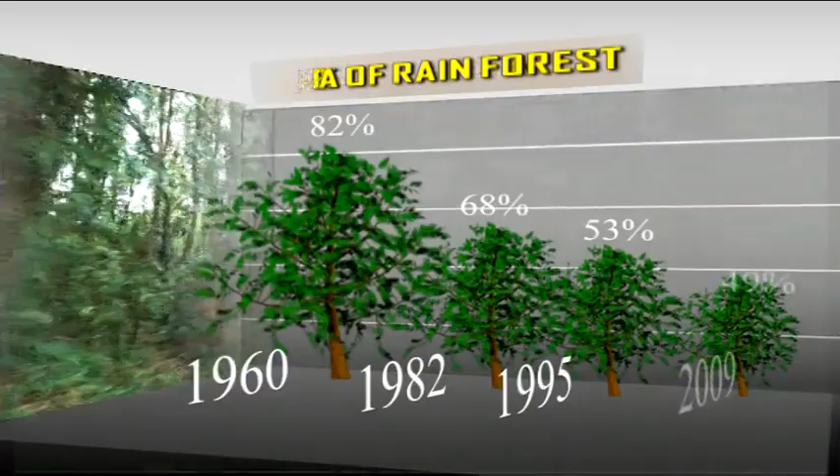On the other hand, bamboo has many advantages to serve as a substitute for wood construction. Bamboo is one of the fastest growing plants on earth. Unlike trees, all bamboo has the potential to grow to full height and girth in 3 to 5 years, whereas teak, the usual building material, is ready to be used after 40 to 50 years. Bamboo grows easily and can live and adapt in all places.

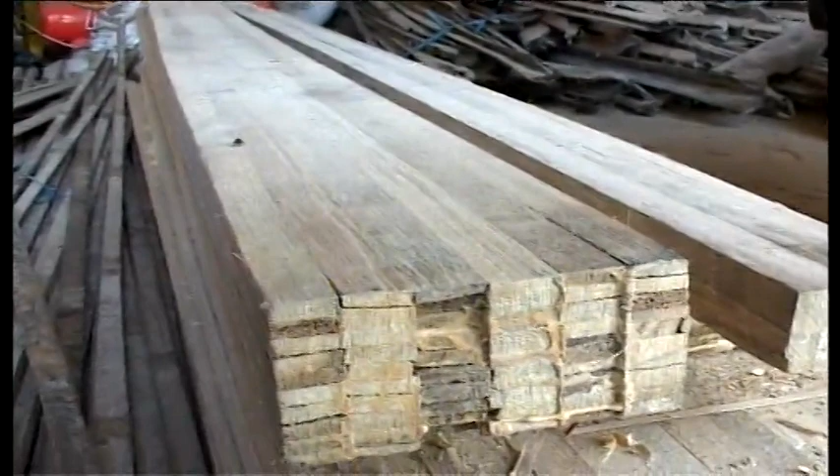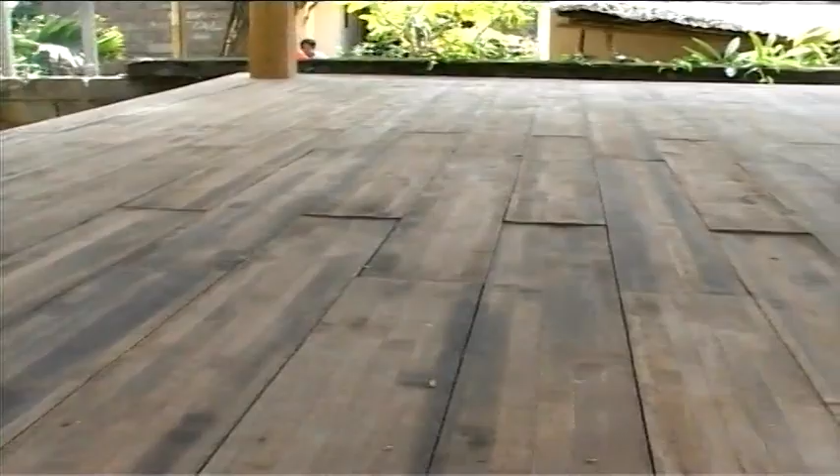The bamboo is then sliced into ribbons, cured to the proper moisture content, and then engineered back together with adhesives using gluing techniques and pressed together to produce a rectangular shape, becoming one entity. Through the stage of cutting bamboo, an adhesive is added so it becomes a board, plywood or beams. Laminated bamboo does not retain the characteristic shapes of the bamboo raw material from which it is produced.

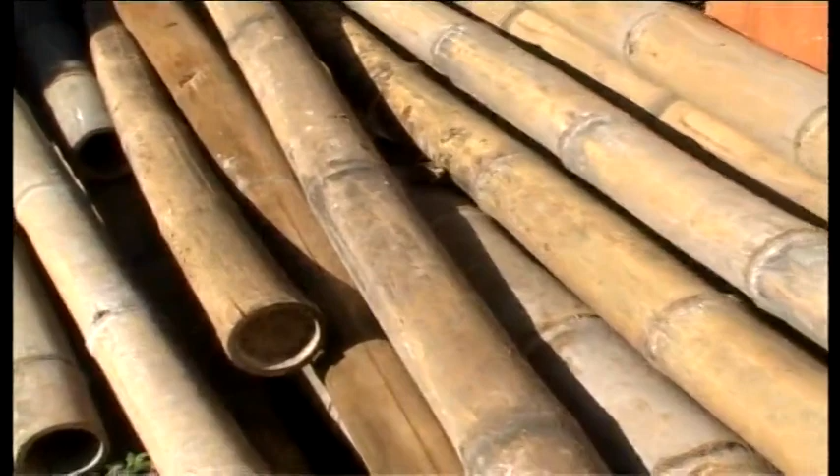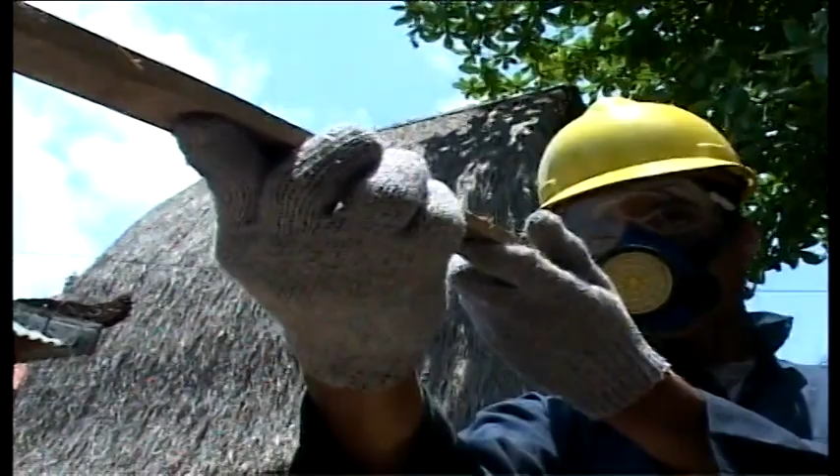Petung bamboo, bulung bamboo, and lyre bamboo can be used as raw materials. Among the three, petung bamboo has a fairly thick stem wall, between 10 mm and 30 mm. Its thickness will determine the use of an adhesive in laminating bamboo components. The bamboo is harvested between 3 to 5 years of age for optimal hardness and strength and is free from pests.

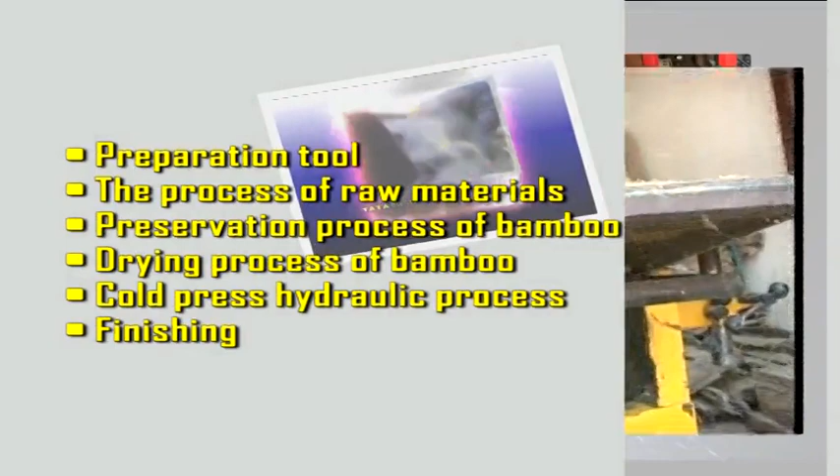The process of laminated bamboo production requires several steps: preparation of tools, processing of raw materials, bamboo preservation, drying bamboo, cold pressing, and finishing. Machetes and axes are used to skin the bamboo. A handsaw is used to cut the bamboo according to the desired size.

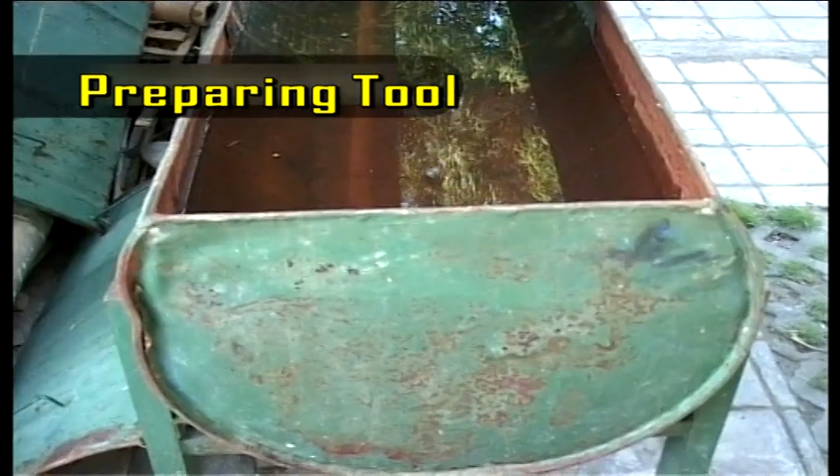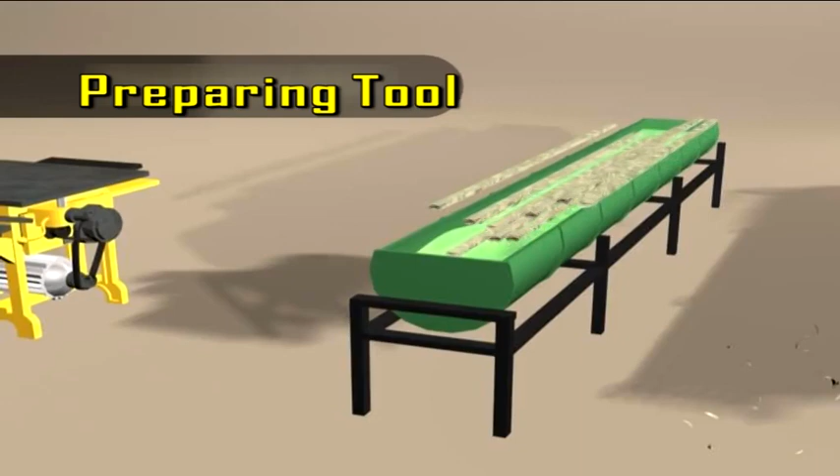Another tool used to process the bamboo as raw material is a vessel with a width of 39.5 centimeters, height of 45 centimeters, and 450 centimeters in length, which is used for soaking the bamboo in the preservation process. A planer is used to smooth and shape the strips of bamboo for the lamination process. Other tools needed are a brush, digital scales, measuring cups, an adhesive, and a cross-linker.

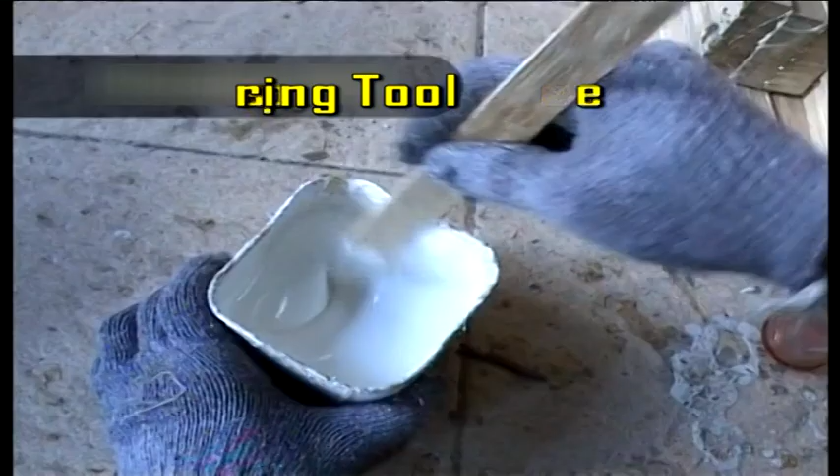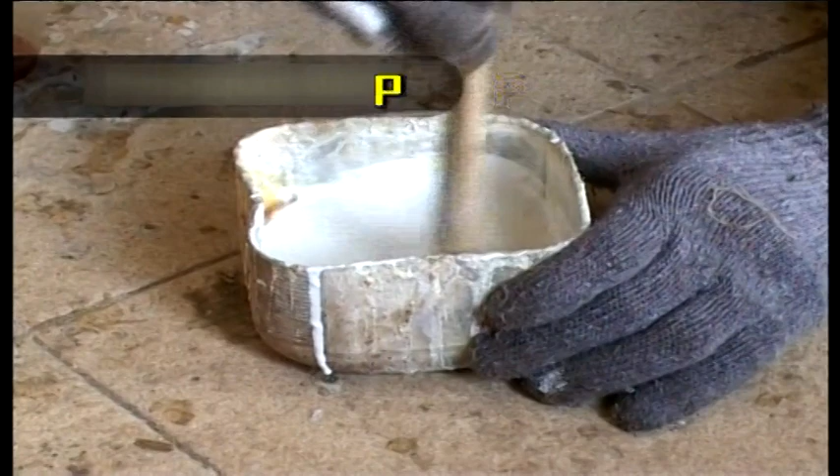The adhesive we use is a polymer. A polymer is a thick white liquid, with the same thickness as wall paint. Polymer is easy to harden at wide temperature variations, more environmentally friendly because it does not contain formaldehyde, economical, and has a strong adhesion.

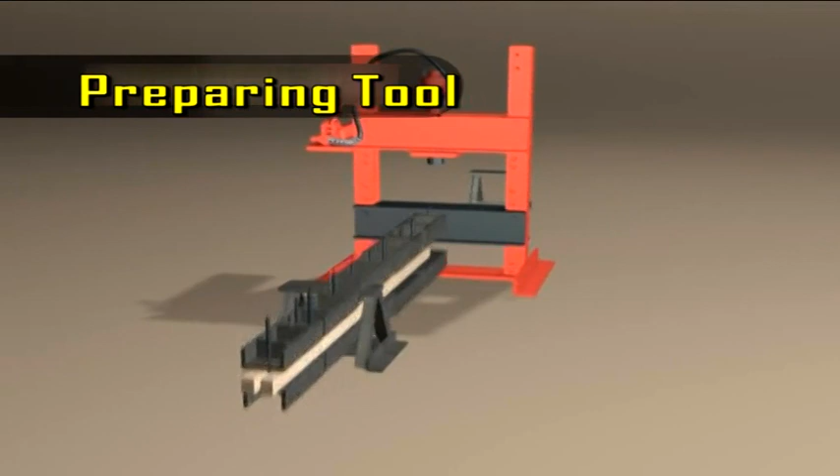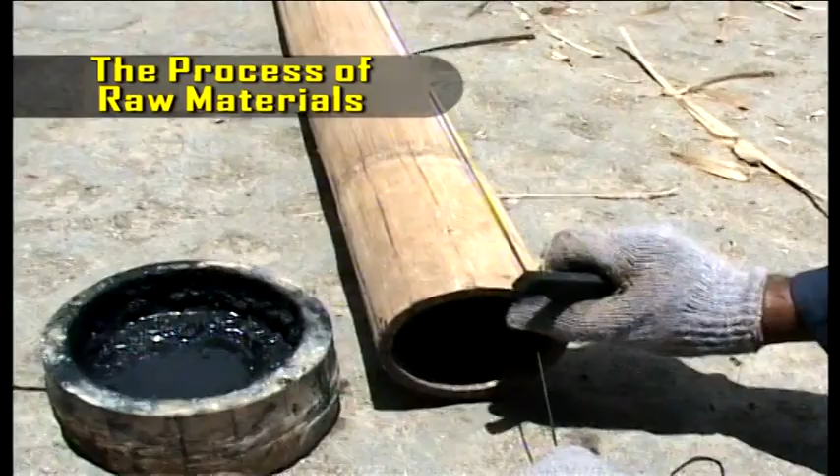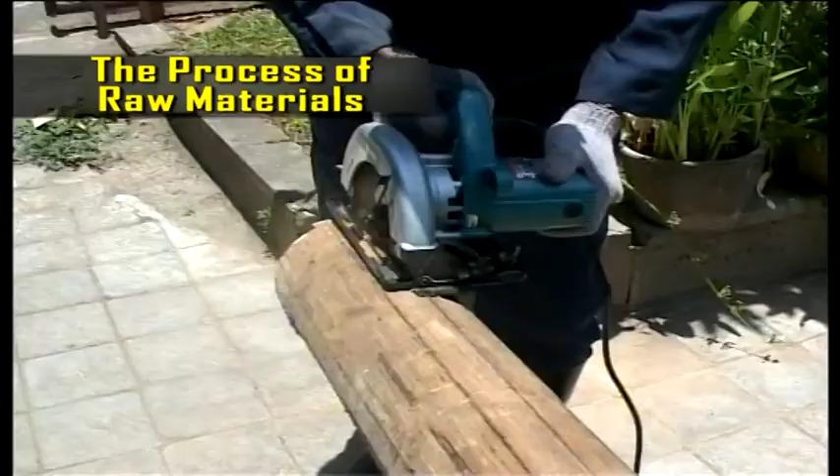Isocyanate is used as the cross-linker, with a proportion of 10% cross-linker and adhesive of 225 grams per square meter. Hydraulic compression complete with its clamps is required for the lamination process. Dried bamboo skins are removed and then ripped lengthways into slats of 25 mm to 35 mm wide. This technique is done by using a cutting machine or a hand saw.

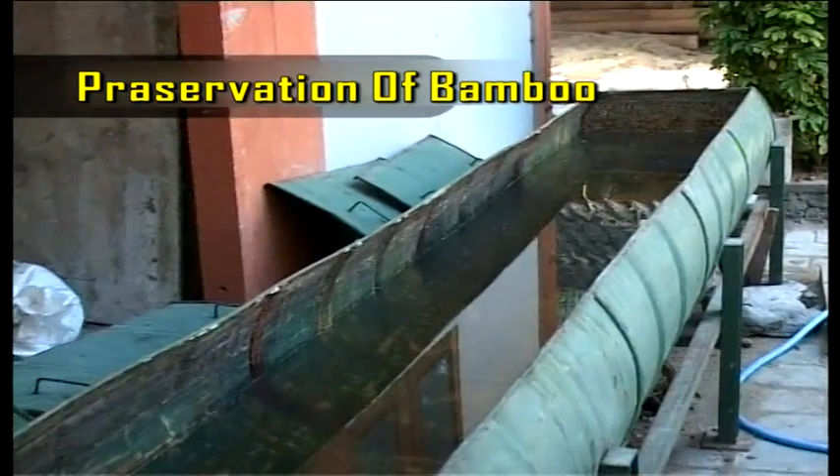The types of chemicals allowed by the Commission of Pesticides, Department of Agriculture, among others, are copper sulfate, potassium dichromate boric acid, sodium dichromate boric acid, silicate copper, fluoride ammonium dichromate acid, sodium tetraborate boric acid, and polyborate boric acid. A 16 SP impralit or boron is used to protect the bamboo against pests using cold immersion preservation techniques. This technique is performed as follows.

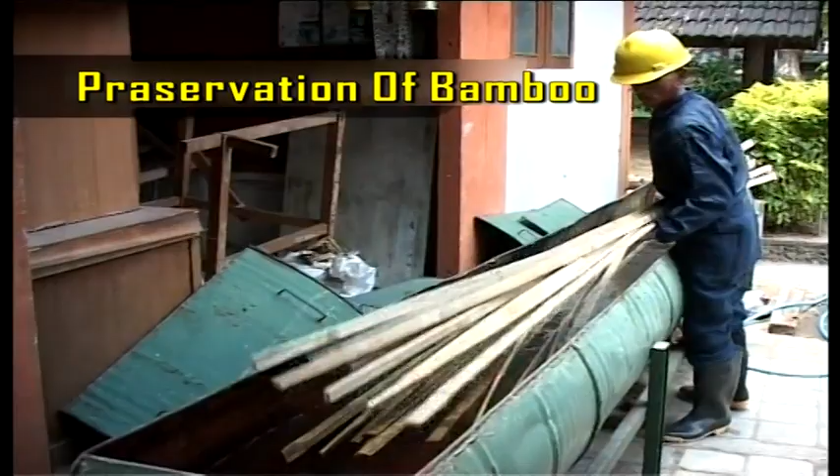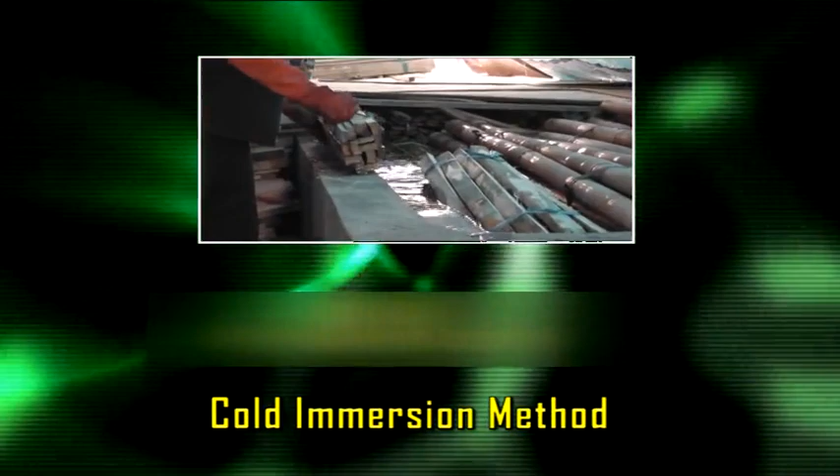Bamboo is inserted into a long vessel with a diameter of 55 cm and 450 cm length. The bamboo is soaked in a mixture of boron and water with a ratio of 5% of the volume of water. The soaking process is performed for at least 5 days. Bamboo that has been preserved for 5 days can continue to the drying process to reduce the water content in the bamboo. Bamboo is ready to be processed when the water content has reached 15%. Bamboo strips are planed to remove the nodes with a machine planer to obtain a precise size.

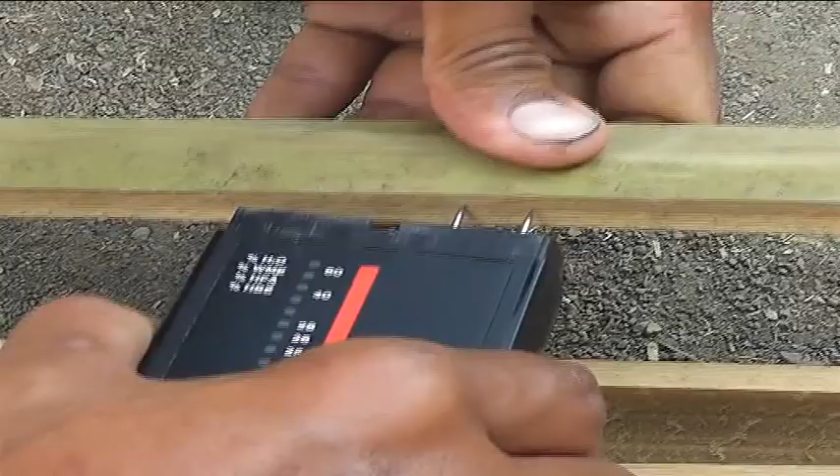The lamination process is staged as follows. Prepare raw materials, which are bamboo strips that have been smoothed and preserved. Smooth bamboo strips are glued by arranging them vertically, parallel to the fiber arrangement, in order to obtain a set of bamboo strips. Bamboo strips must be completely dry and clean so that the glue and the material stick perfectly.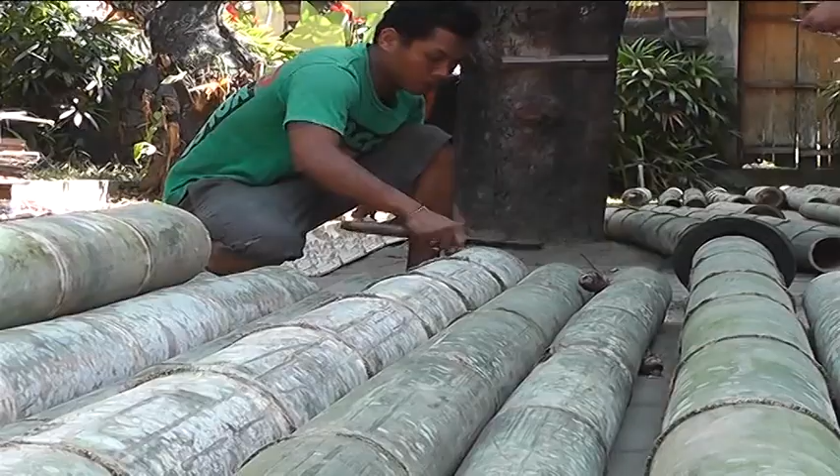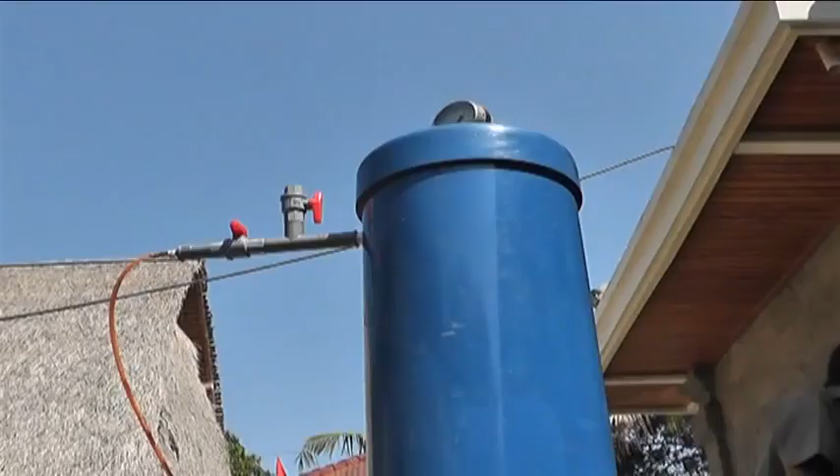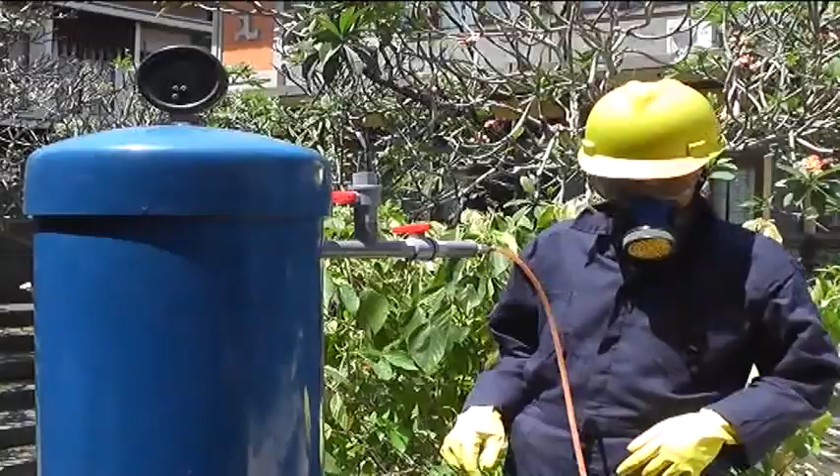Necessary equipment includes measurements, a measuring cup, bucket, stirrer, and others. Prepare an anti-corrosion tank with a dimension of 30 to 150 centimeters, a compressor, gloves, and a mask.

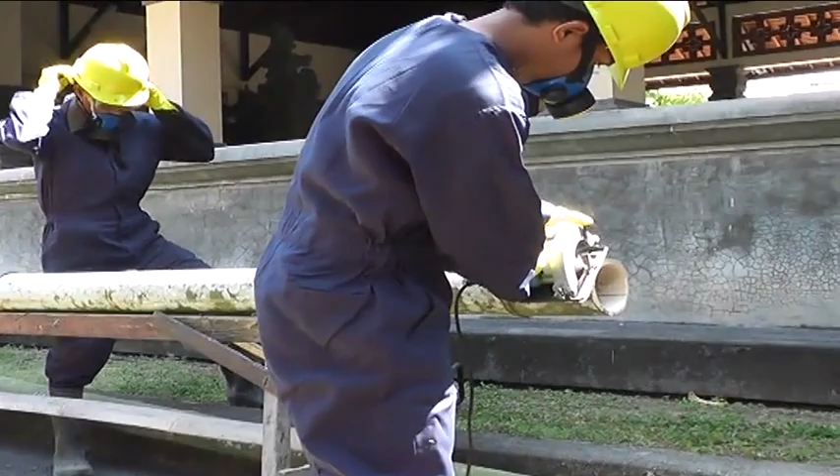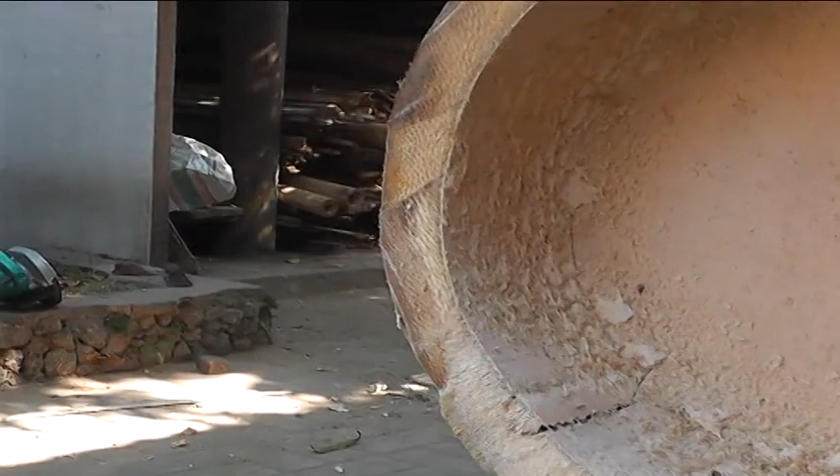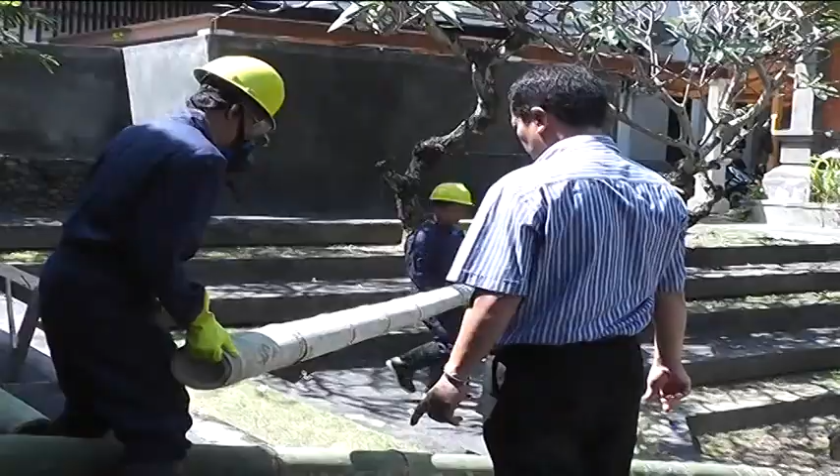The following procedures for bamboo preservation using Boucherie machine are: Make sure bamboo is selected according to criteria. Then slice into a flat surface until its fiber has appeared. Place bamboo that have been cut sideways about 30 degrees.

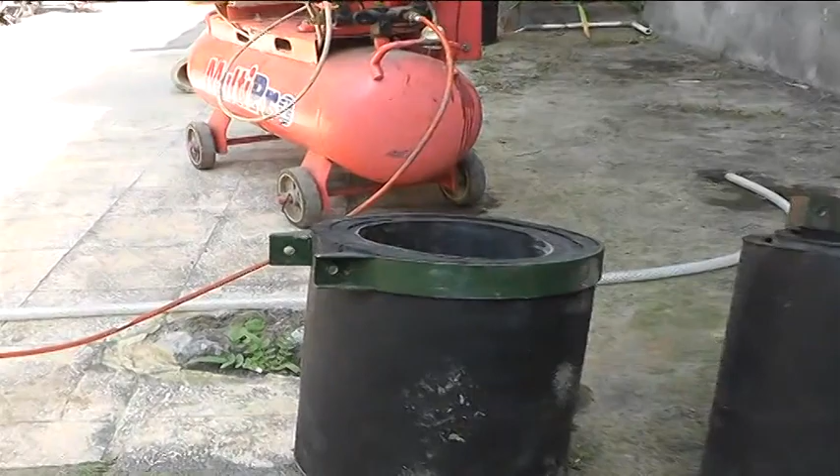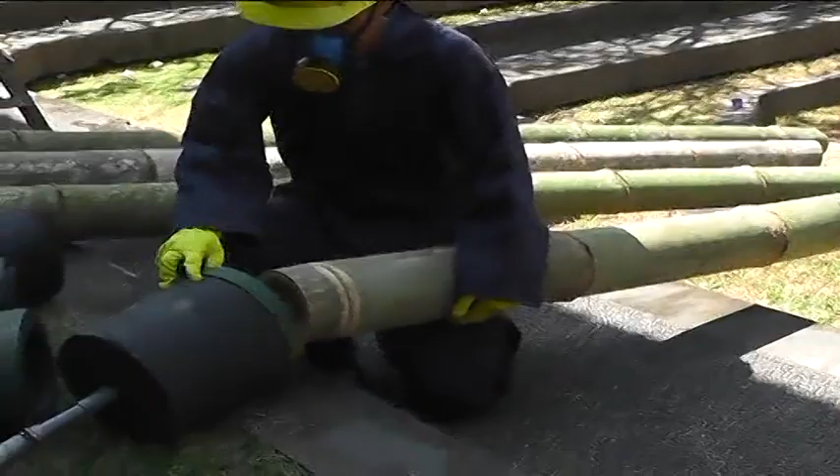Prepare the rubber plug, insert the hose connector into the connector, and make sure that the hose is connected strongly. Then insert the connector into the bamboo that has been prepared. Tighten the screws on the connectors to prevent leaking. Do check if the connectors are still connected with bamboo.

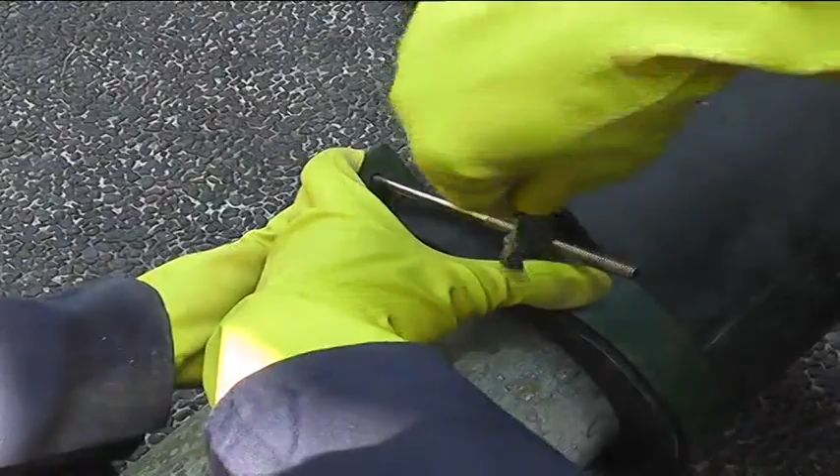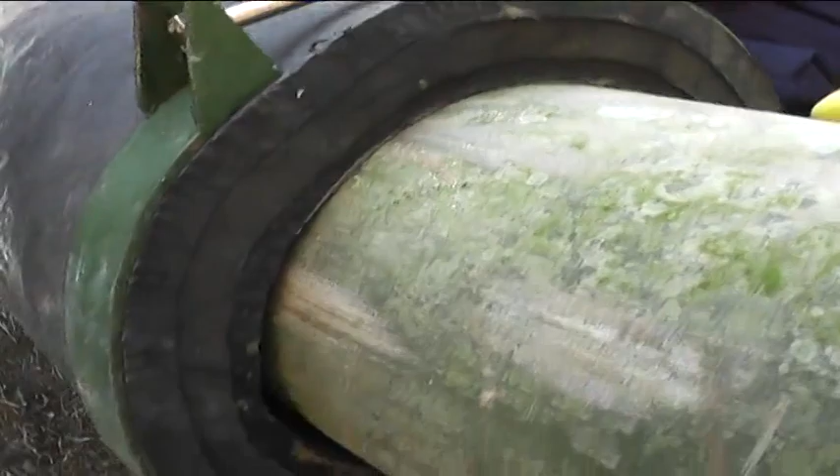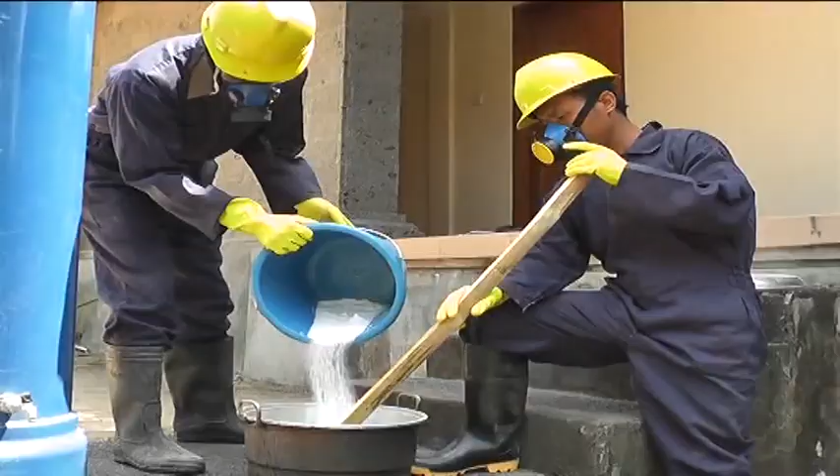Borax is then inserted into the water with a minimum temperature of 70 degrees with a concentration of 3.5% of borax. Stir it until it blends. Prepare a fabric filter to reduce dirt in the water before entering the tank. Put the mixture of borax into the tank and turn the compressor.

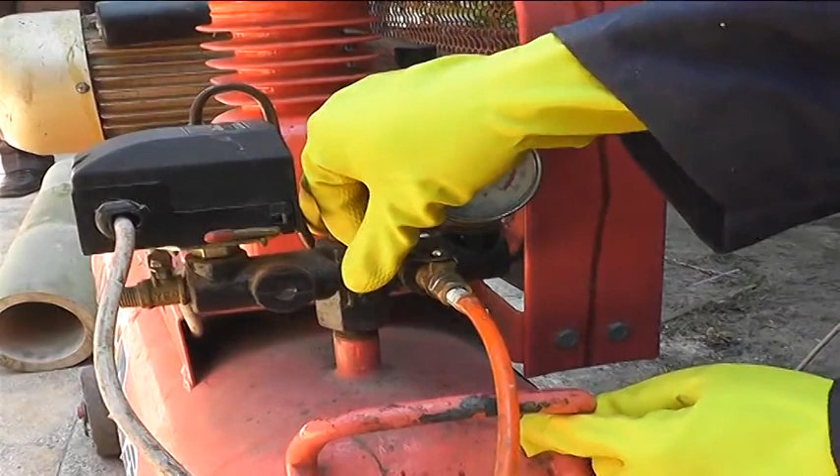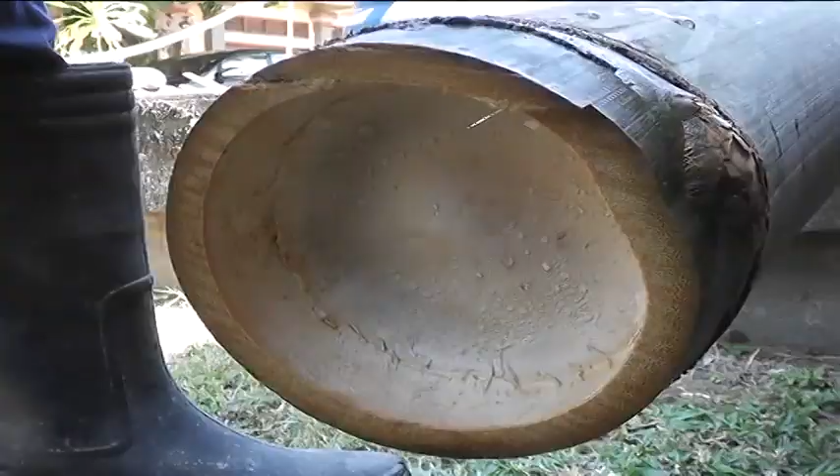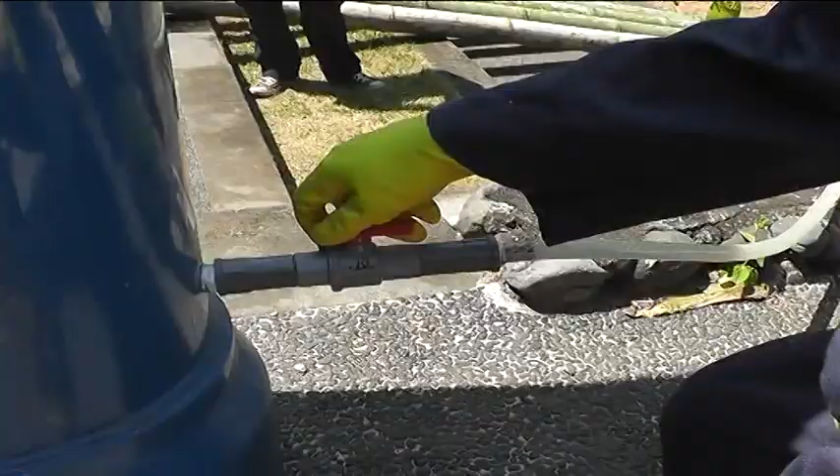Check that the air pressure of the tank is enough. Make sure the hose connection is not leaking. Apply the substance of diphenyl carbazide at the lower end surface of bamboo. Because of the air pressure in the compressor, the mixture of borax and water will flow through the connecting pipe into the bamboo.

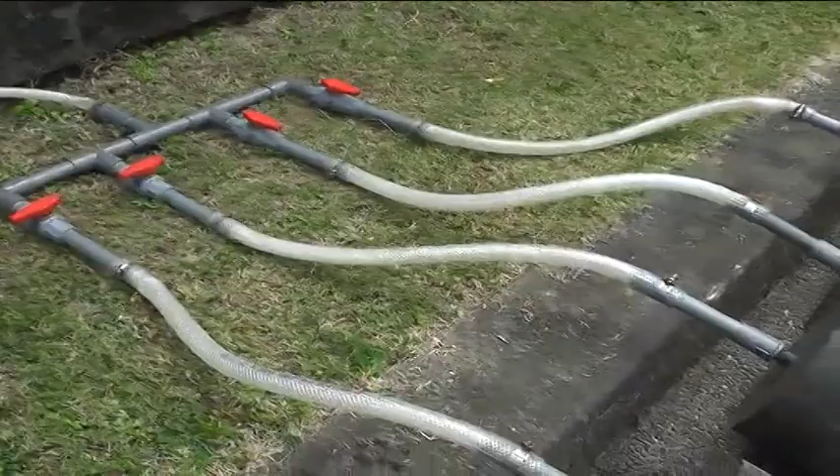Wait for a few moments to see the penetration into the pores of the bamboo. When you see the reaction, the liquid will come out as clear as water at the surface of the tip of bamboo. It is called the starch. And then the color of the liquid will gradually become darker when the mixture of water and borax have reached the end of the bamboo and react with the substance of diphenyl carbazide. The process is complete when the concentration of the liquid that comes out of the bamboo is the same concentration with the mixture of water concentration.

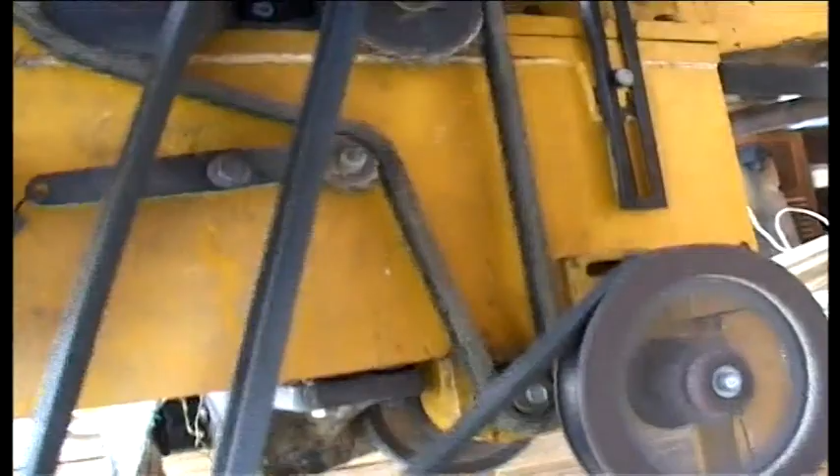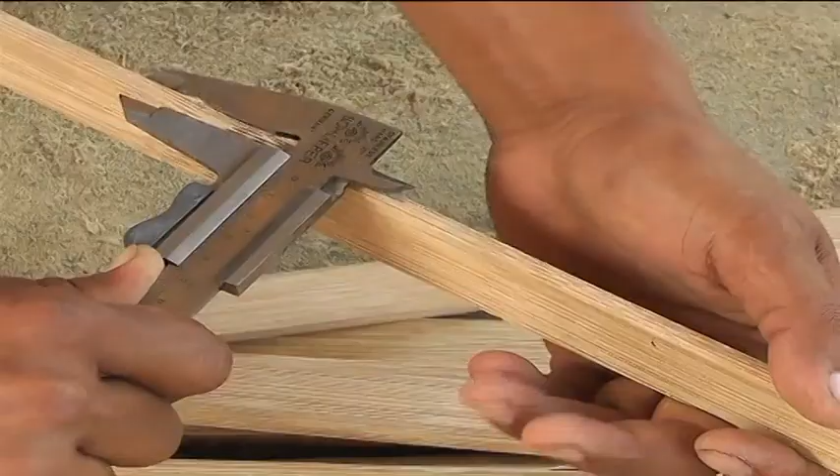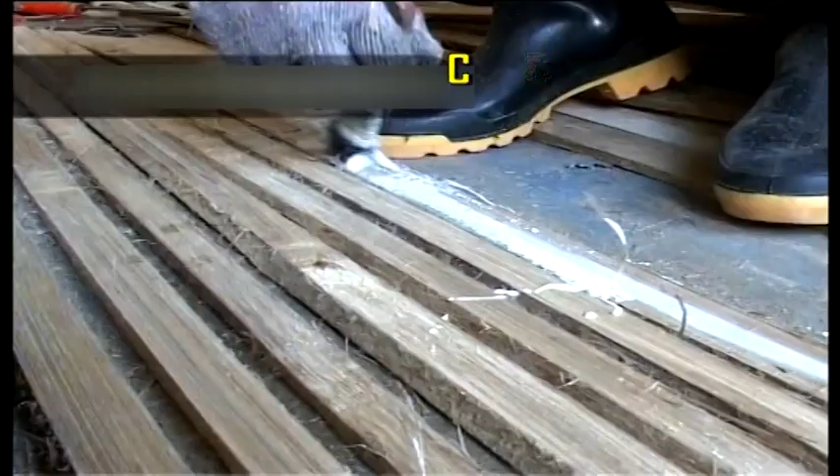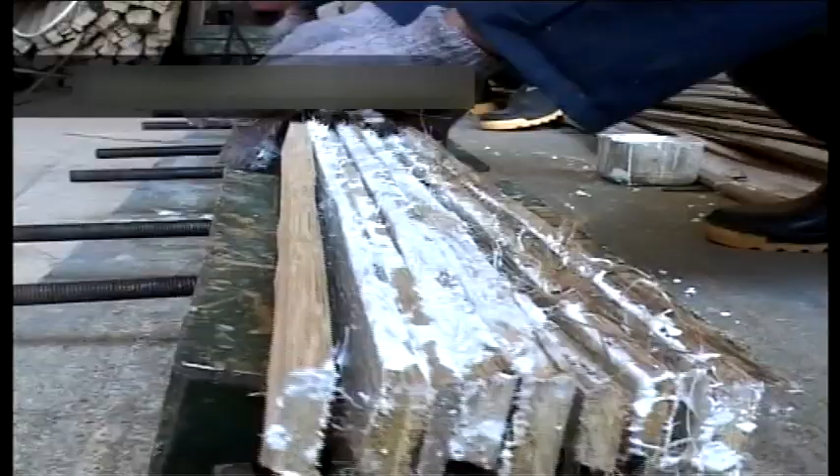Process of laminated bamboo beam manufacture. Necessary equipments are digital scales, a bucket, and a measuring cup. Mix the adhesive with a cross-linker ratio of 10% of the adhesive, and then glue on the surface of the bamboo weighing 225 grams per square meter. Adhesive is then applied to the surface of the bamboo planks, and stack the bamboo planks towards vertical line to receive thickness according to the size needed.

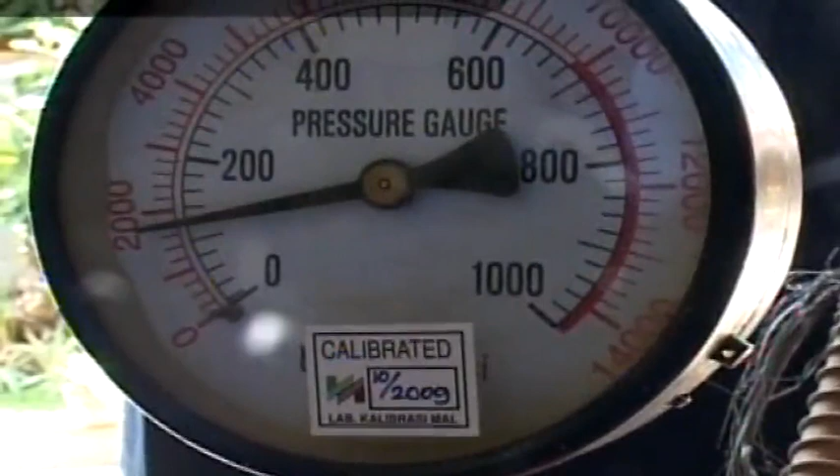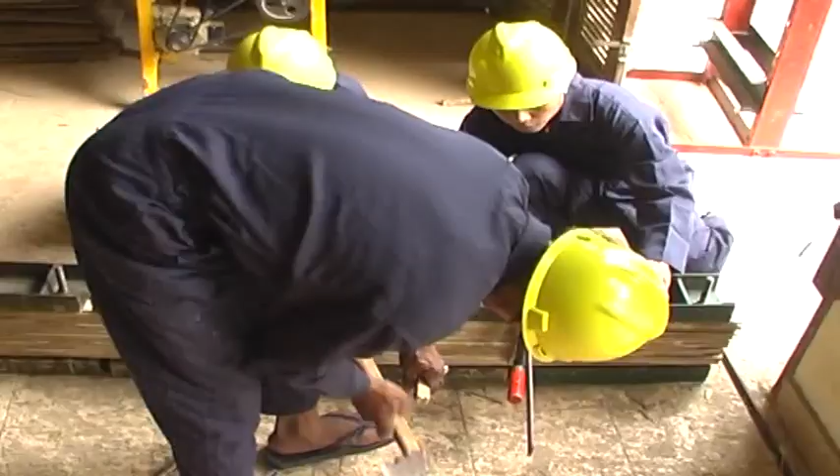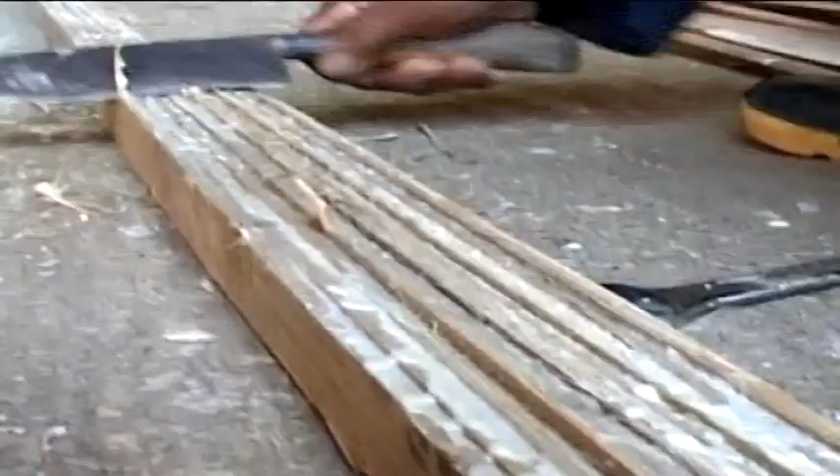The strips are inserted into a clamp for a compression process using a cold press hydraulic at a pressure of 2 MPa. In the process of compression, retightening the bolts is needed to maintain the pressure. After compression, it will continue with the process of drying around 2 hours, or per the provisions in the use of adhesive polymer to receive its best adhesive power. After the drying process, dried bamboo blocks are flattened on each side, and parts of glue that melt out on each side are removed.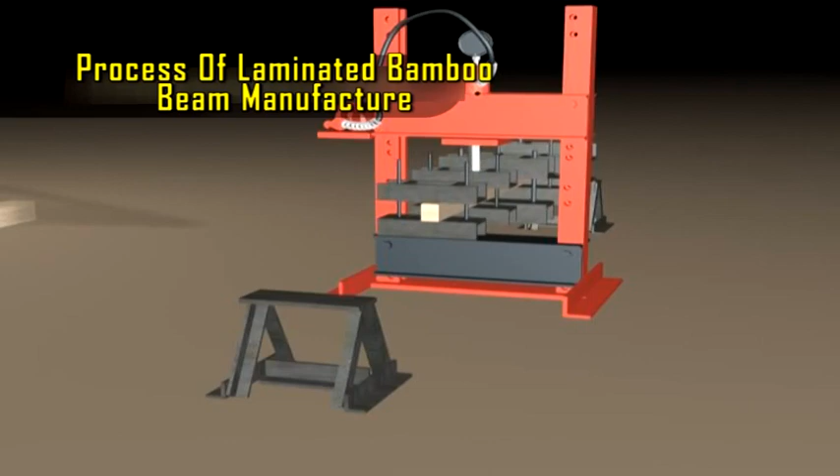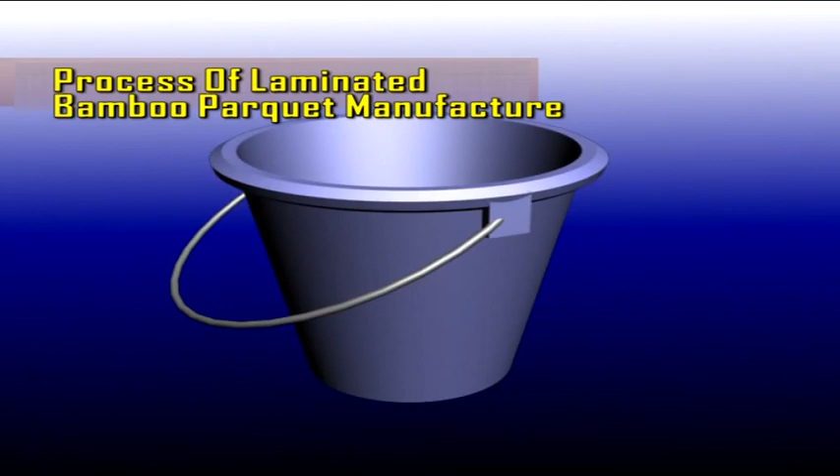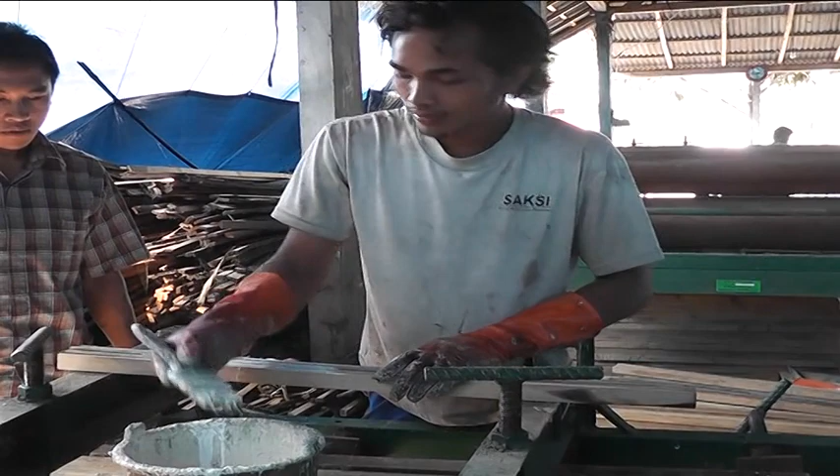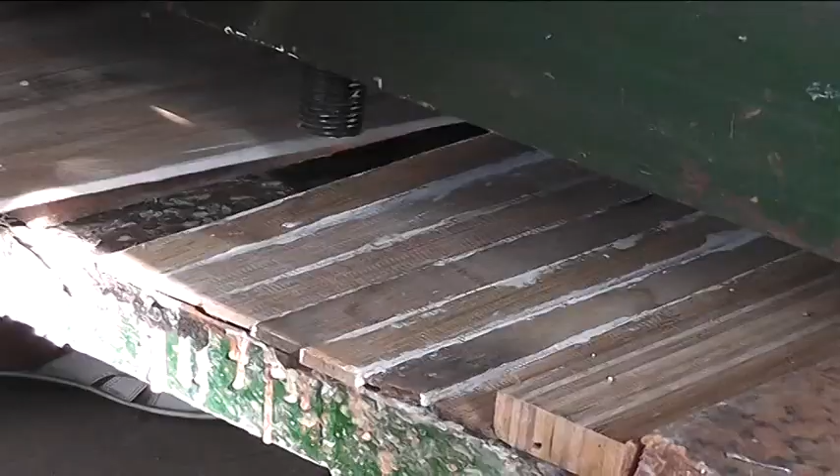Process of laminated bamboo parquet manufacture. Necessary equipments are digital scales, a bucket, and measuring cups. Bamboo stripes are sorted with the same thickness. Mix the adhesive with a cross-linker ratio of 10% of the adhesive, and then glue on the surface of the bamboo weighing 225 grams per square meter. Stack the bamboo stripes into horizontal and vertical direction simultaneously. Leave it for approximately 2 hours to receive its best adhesive power. Open the clamp and remove all the left glue on each side until the block is smooth.

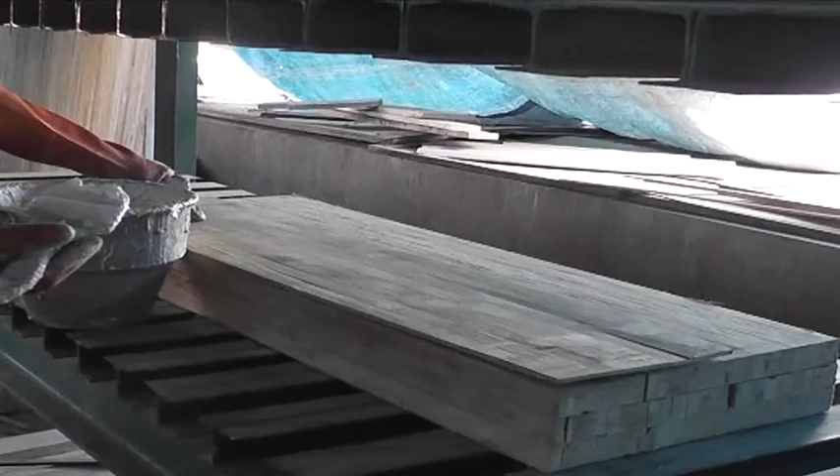Stack the bamboo stripes into horizontal and vertical direction simultaneously and spread the glue onto the surface until it has reached the thickness needed. The stripes are inserted into a clamp for a compression process using a cold press hydraulic at a pressure of 2 MPa. Leave it for approximately 2 hours or the provisions in the use of adhesive polymer to receive its best adhesive power.

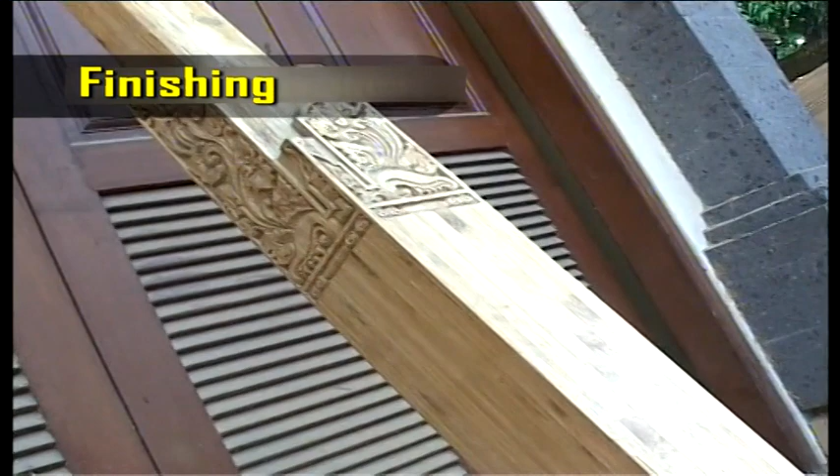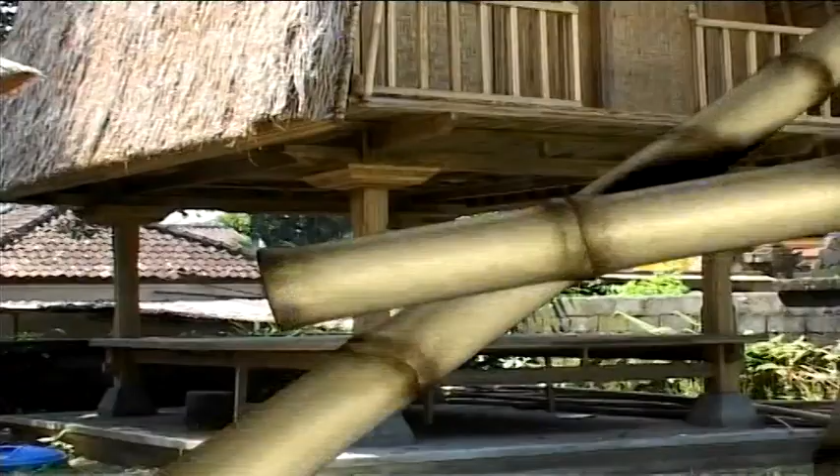Carving can be done at a beam profile to assemble with other profiles. The process of assembling each part of the building structure is adapted to its function. This traditional system of building structures is called knockdown, using a connector or wedge of laminated bamboo material. Laminated bamboo beams that have been carved and assembled should be coated transparently to make it look textured.

Bamboo has many advantages as a substitute for wood as building materials or furniture. Bamboo is planted easily and requires no special maintenance. For the cultivation of bamboo, no large investments are required, with the result obtained continuously. Reinvestment is not needed. Cultivation of bamboo can be done by everyone, using simple equipment, and does not require provision of high science. In terms of artistic, laminated bamboo has unique fiber characteristics. The use of bamboo can be an alternative or a solution to wood constructions in terms of the supplies in our country.